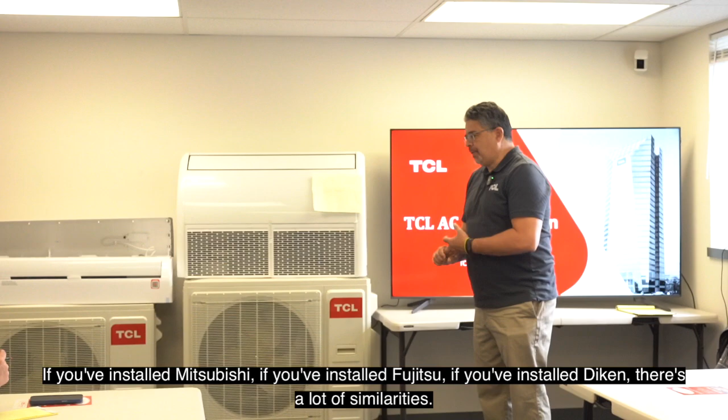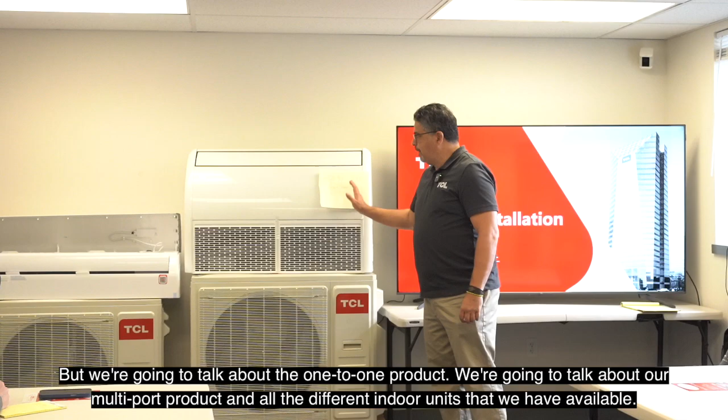country. If you've installed Mitsubishi, if you've installed Fujitsu, if you've installed Daikin, there's a lot of similarities. There's very little that separates everyone in that aspect. But we're going to talk about the one-to-one product, our multi-port product, and all the different indoor units that we have available. That is our central air system. Everything we have here is inverter, and that central air system is our heat pump inverter, and we'll talk about

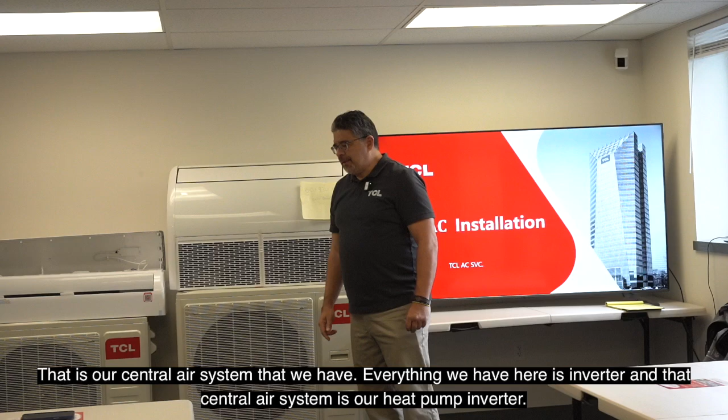that as well. So we have 4 hours, and I want to try to get as much technical information to you as possible. I thank you for giving me your emails, because with that, I will be sending you the service books on everything here. So you have error codes, how to troubleshoot it, startup procedure, how to wire it, things like that. We'll go over that today.

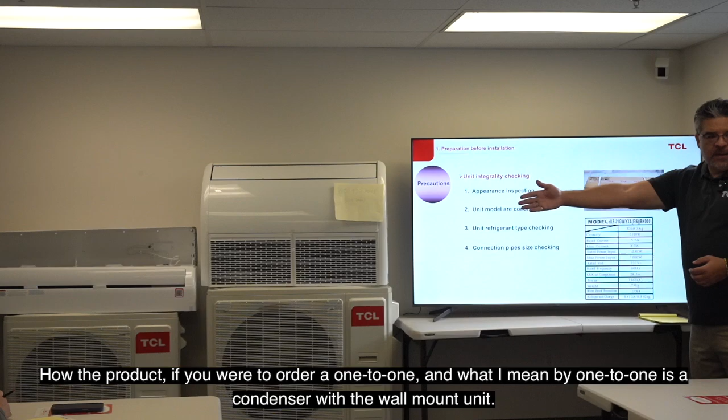So, preparation for installation. This is going to be strictly on the ductless product. We're going to focus on the meat and potatoes. If you were to order a one-to-one, and what I mean by one-to-one is a condenser with the wall mount unit. All right, picture the one that's in the corner there in front of the banner.

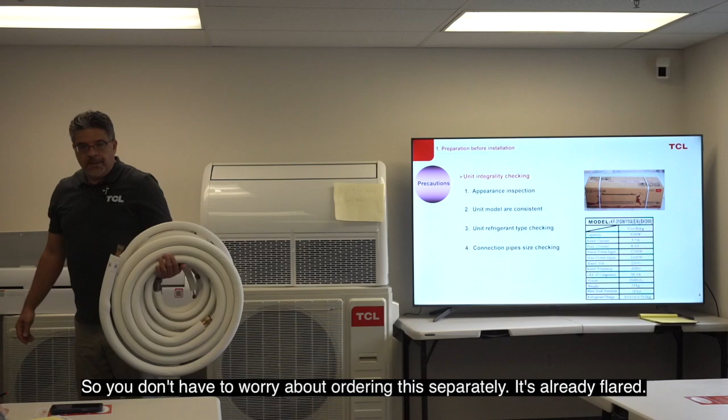When you order our TCL one-to-one, it's going to come with the line set that's already flared, and it will come with the communicating cable. So you don't have to worry about ordering this separately. All right, it's already flared.

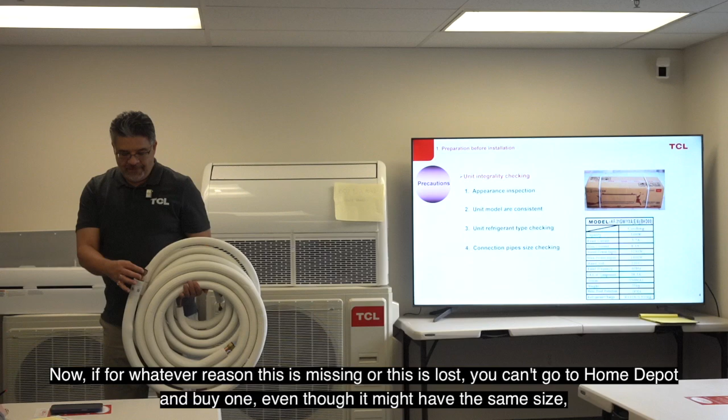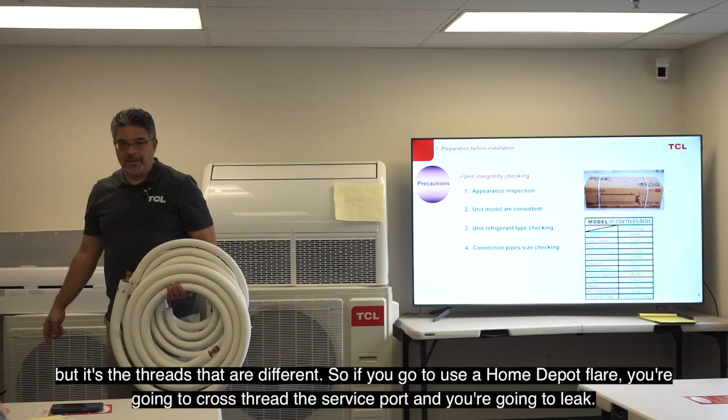Now, if for whatever reason this is missing or lost, you can't go to Home Depot and buy one, even though it might be the same size, because the threads are different. So if you use a Home Depot flare, you're going to cross thread the service port and you're going to leak. So keep that in mind.

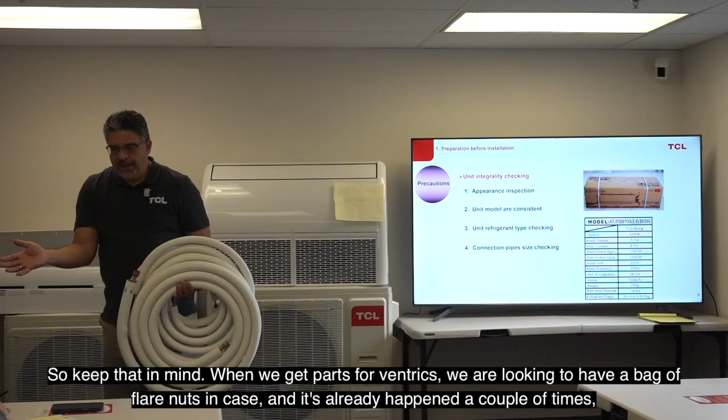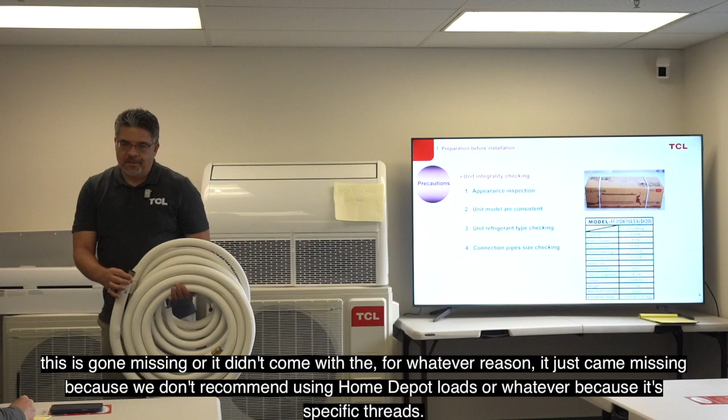When we get parts for Ventrix, we are looking to have a bag of flare nuts in case, and it's already happened a couple of times, this has gone missing, or it didn't come with it for whatever reason. Because we don't recommend using Home Depot, Lowe's, or whatever, because it's specific threads. So that's one thing. You're gonna get the line set. You're gonna get the 4.

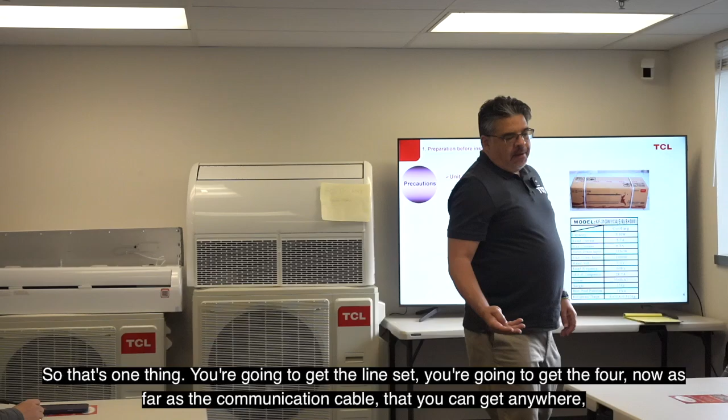Now, the communication cable you can get anywhere, but it's basically 16 gauge, 4 wire. One of them is a ground, and it's stranded, not solid core. You understand what I mean by that, right? Solid core is just one copper line. We look for stranded because we are talking about DC communication, and when the line is stranded, where the copper looks like a bunch of hairs, it strengthens your communication signal.

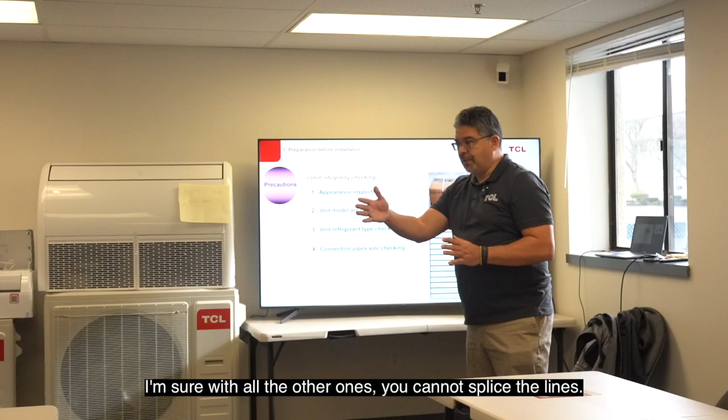So you have one solid core, and your DC volts bounce like that as communication. But if you have a wire that has several strands, it's going to be bouncing off of each hair, strengthening that communication. This is why they look for stranded, and you cannot splice it. I'm sure with all the other ones, you cannot splice the lines.

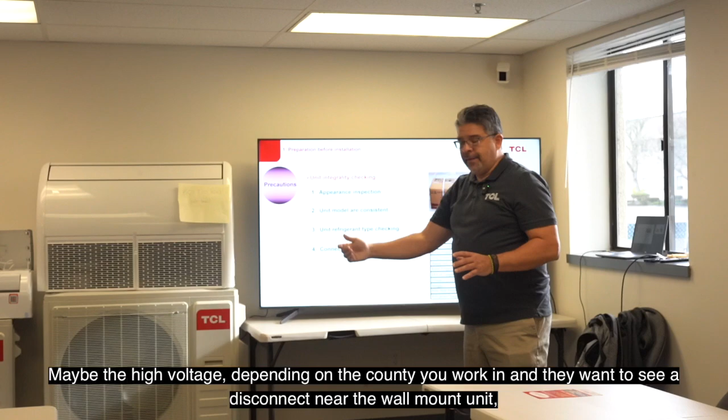Maybe the high voltage, depending on the county you work in, they want to see a disconnect near the wall mount unit, but usually it's a home run from the condenser to the wall mount unit. You cannot splice between there, because the splice is usually not a good connection, and you'll have that nuisance intermittent communication problem, and you don't want that either. So those simple little things are what you want to keep in mind.

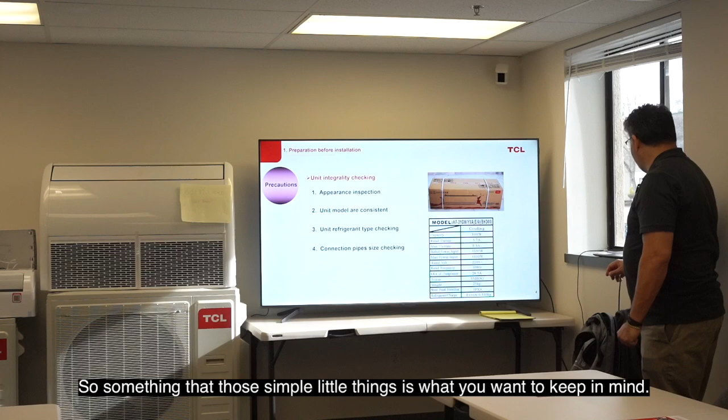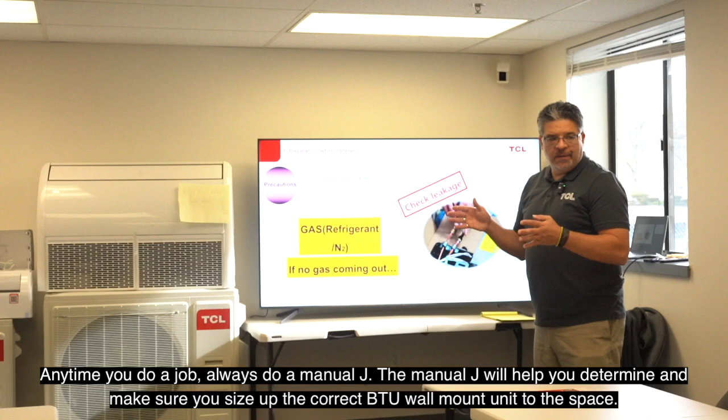I'll mention it today like I did yesterday. Anytime you do a job, always do a manual J. The manual J will help you determine and make sure you size up the correct BTU wall mount unit to the space. Because you have to take into account the insulation, the windows. It's not just square footage, okay?

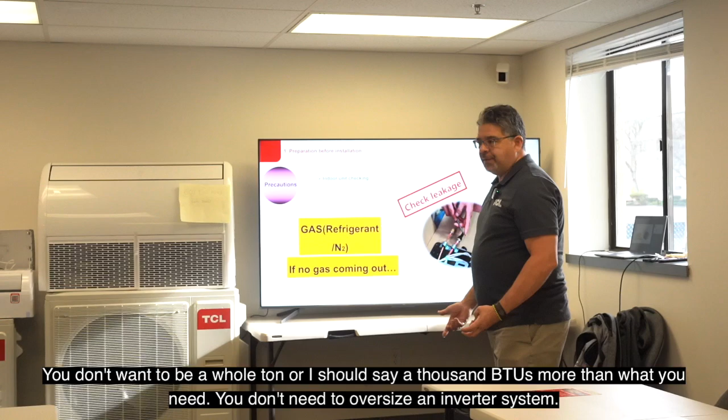Because you don't want to be a whole ton, or I should say 1,000 BTUs more than what you need. You don't need to oversize an inverter system, okay? Because you will still run across the same problem as a straight cool unit. If you're oversized, you're going to drop the temperature, but you're not going to dehumidify. It's going to be cold and clammy, and that's the worst call to be at.

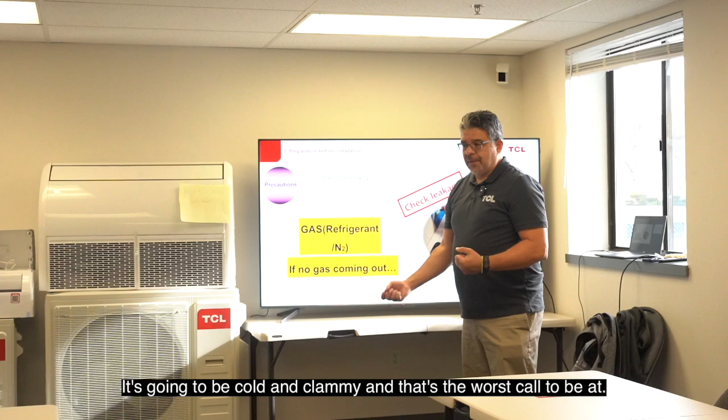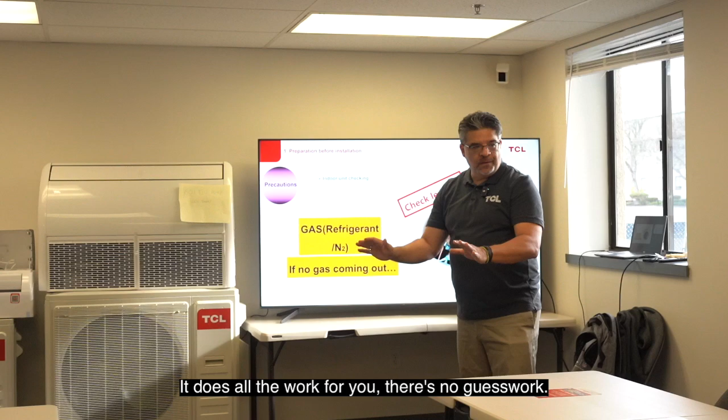All right, to cover your rear ends, do the manual J. It does all the work for you. There's no guesswork. Then you see exactly how many BTUs you need for cooling and heat, and that's the size you get. Throughout these slides, we'll show you what sizes we have. We have from 9,000 BTUs to 3 ton. And then on the 9 and the 12, we have 115 volts and 230 volts.

So if you come across a house that doesn't have space for 230 volts, but they have room for 115, we do have a 9,000 and a 12,000 system that you can use for 115 volts. Okay. But always keep in mind that's going to be a different size breaker between the two.

Okay. So when you receive it, the indoor units do come pressurized. So when you push in the Schrader pin, it's going to be nitrogen. It's not gas. So the first thing you do is push that to make sure you get some nitrogen coming out of it. That tells you the unit is not leaking. All right. If you compress that and nothing comes out, don't start the install. Call Ventrix immediately and get yourself another head. Something happened. It leaked out.

It's nitrogen. Okay. These condensers don't come pre-charged? The condensers come pre-charged. The indoor unit is the one that comes with nitrogen. So just quickly push it in and see if you get nitrogen coming out. Boom, you're good. But if you get nothing, there's something wrong with the indoor unit. Stop the install right there.

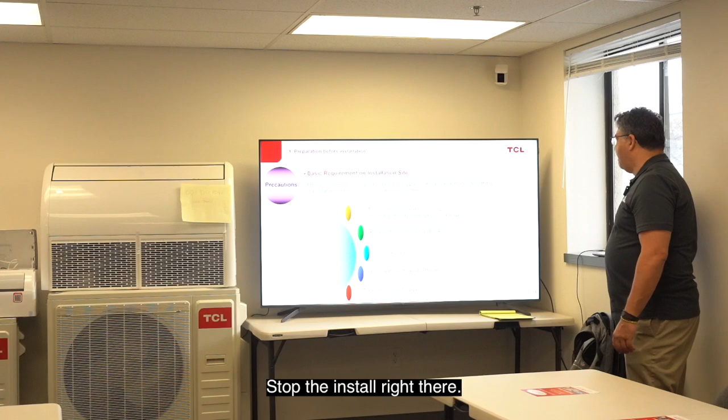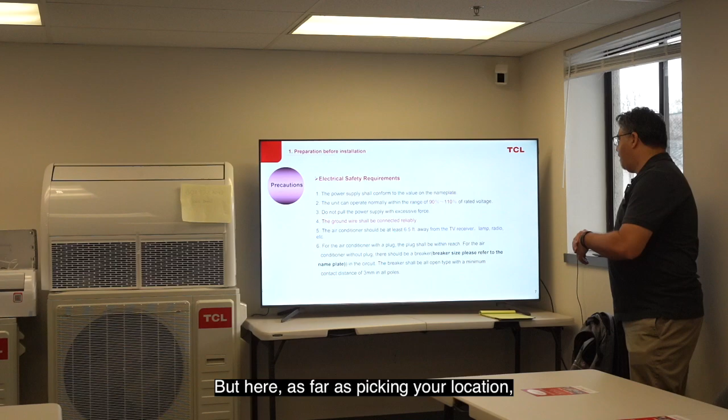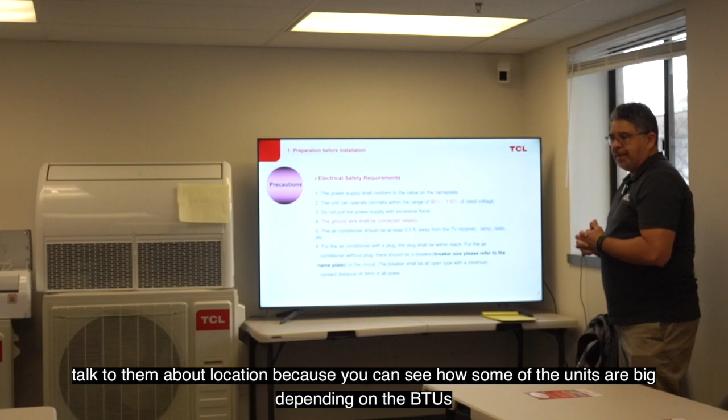Now, yeah, we are talking about the new R454, so we'll be talking about ventilation and things of that sort later this morning. But as far as picking your location, when you're talking to the homeowner in regards to this ductless product, talk to them about location, because you can see how some of the units are big depending on the BTUs and also on which model you choose. This is our Breeze In 24 SEER unit, and you can see it's kind of big. That's our Elite 20 SEER model.

You talk to your homeowner and say, hey, this is what it's going to look like mounted on your wall. And you might have some that will be like, yeah, I don't like the way that looks. So then we have a slim duct unit. This is the one that you would find in a soffit. It'll be a little bit more hidden. Or up in an attic, all right?

We also have a cassette. This is the panel of the cassette, but we also have a cassette model where in the drop ceiling it'll fit perfect on this grill here. But you just have to remember you need access to service that unit, the cassette, because the board is external on the top.

You can't get it from underneath. All right. You see the two wall mounts, and then this model here is our floor ceiling model. You can install it one of two ways. This is how it would look if you put it on the floor, up against the wall. And in the ceiling, all you do is just flip it like that. All right, up against the wall, but up on the ceiling.

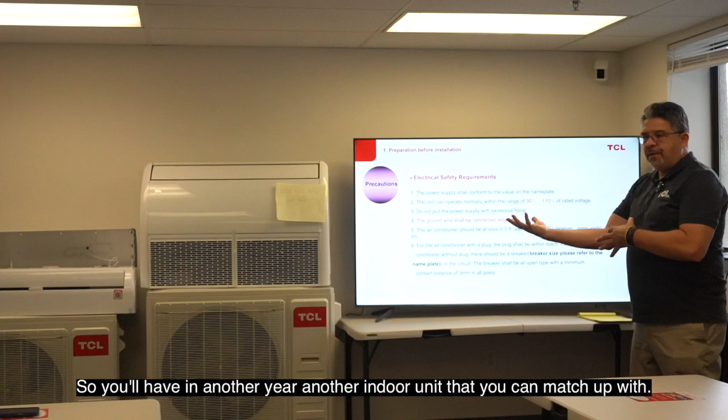So this would be something for maybe a store or classroom or something where there is no attic. Screened-in room, whatever. Floor ceiling model. And we're working on an air handler type to go with this multi-port. That air handler doesn't go with this system, that's separate. But we are working on an air handler model to go with these condensers. So you'll have, in another year, another indoor unit that you can match up with, okay?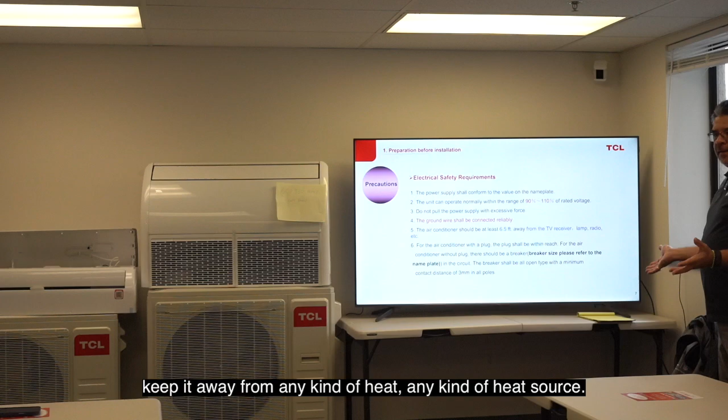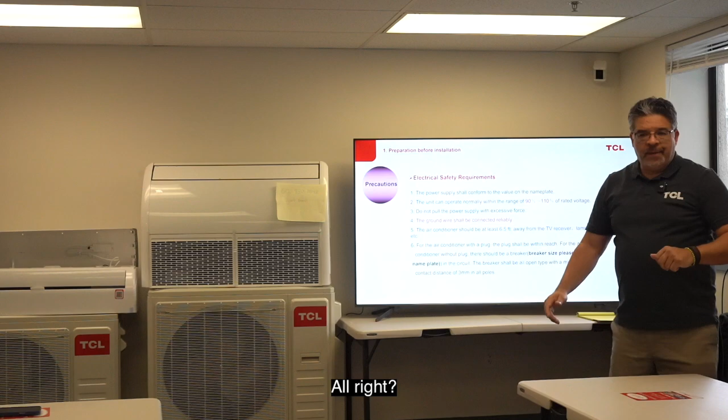So when you are picking a location, you want to keep it away from any kind of heat source. Like these TVs give off a lot of heat. So you want to keep it away from the TV. You want to keep it away from lamps. Keep it away from a chimney, things of that sort. Try to put it central on a wall. Because you have louvers that, when the system is running, modulate vertically and also horizontally. So when it's centrally located, you get that airflow that covers the entire room. All right.

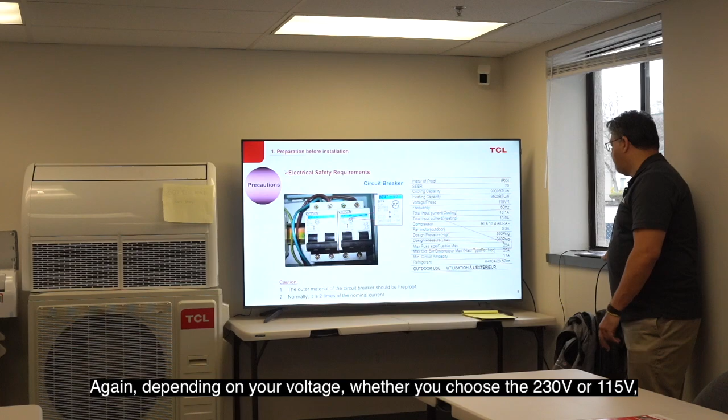Here we're talking about our BTUs. So again, depending on your voltage, whether you choose the 230 volt or 115, look at your fuses because they're going to be different between the two. All right.

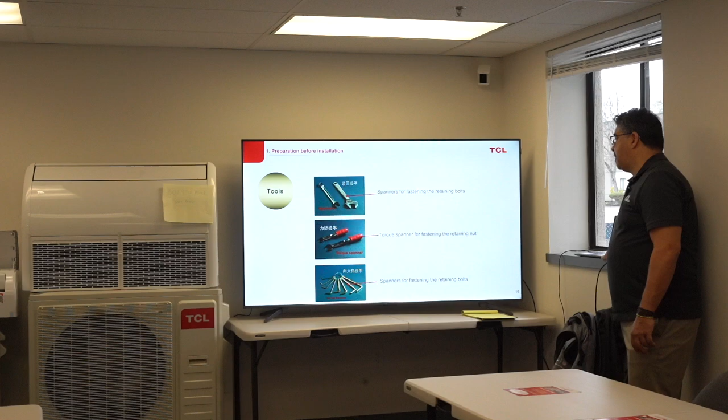Your tools. Here they're showing you a crescent wrench and all those things, but honestly, the torque wrench is probably going to be the most important tool you're going to need. If you've never worked with a torque wrench before, that's in the installation books. It will tell you the measurement. It'll give you the pressure that you need to adjust the wrench, so that when you're tightening the flares, it'll release once you reach that pressure point. So you're not going to over-tighten, causing damage to the actual flare.

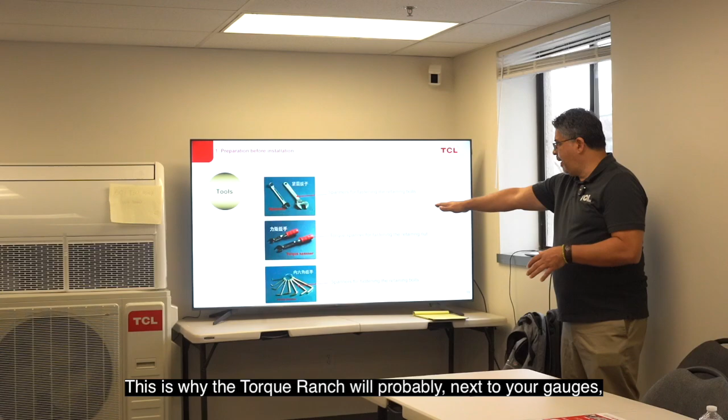So you don't crush the flare, causing a leak, things of that sort, or you don't tighten it enough, causing a leak. This is why the torque wrench will probably be next to your gauges. I think the torque wrench will be the most important tool in the whole installation. It's worth the investment. Your drill bits to cut your holes for the line set.

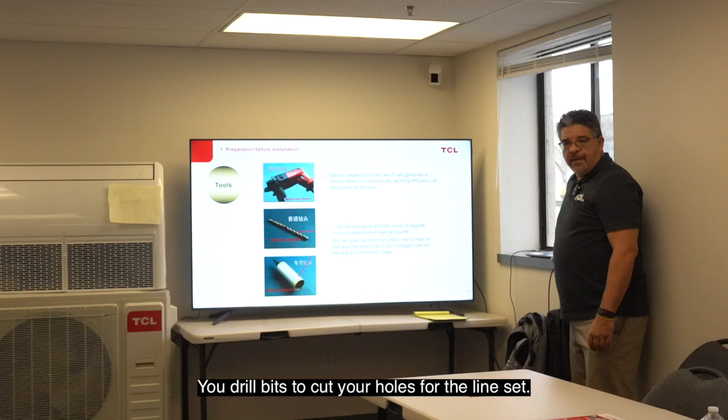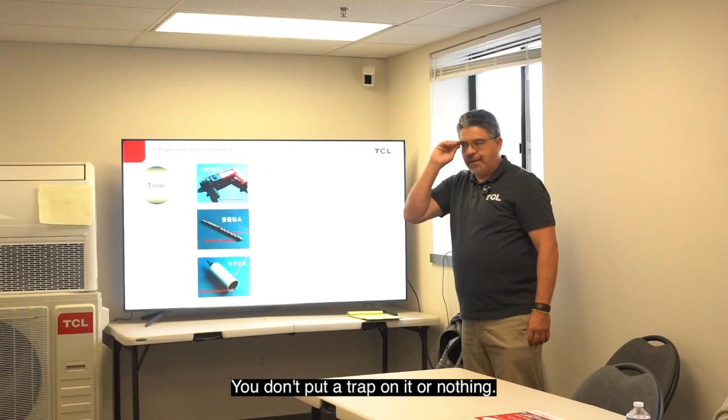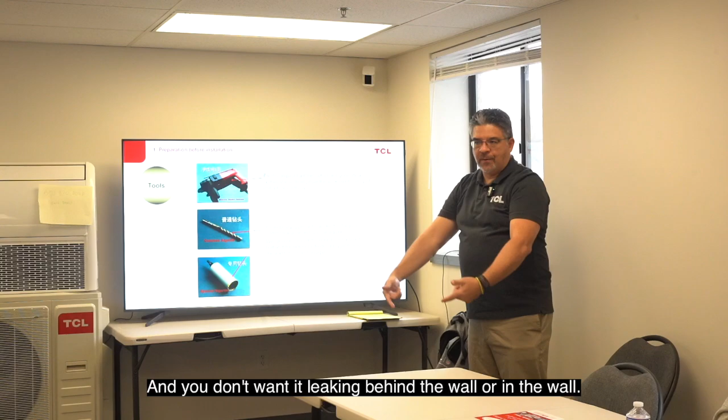All right. The most important thing with the line set, when you're drilling your hole, you don't ever drill it straight. It has to have a quarter pitch downward, because this is natural gravity drainage. You don't put a trap on it or nothing. So with natural gravity, the water will drain downward. You go horizontal, you're going to have issues with water sitting in that line or in your pan. And you don't want it leaking behind the wall or in the wall. Downward pitch. Okay, just a quarter of an inch, doesn't need much. All right.

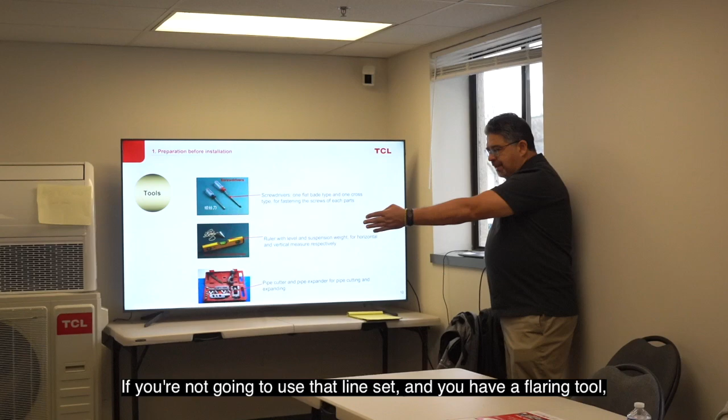Flaring tools: if you're not going to use that line set, and you know how to, and you have a flaring tool and the TCL flare nuts, you can make your own flares. That's not a problem, but it's good to have it, especially if you go more than 50 feet. You can go up to a maximum 25 meters or 82 feet with the 1-to-1s. The line set that's given to you is not 82 feet. So it's nice to have the flare nut tool with you.

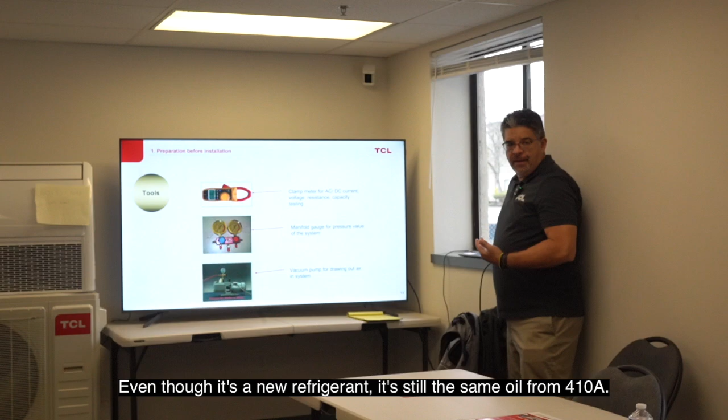Of course, your meter and your gauges. Vacuum pump, obviously, very important. Even though it's a new refrigerant, it's still the same oil from 410A. That oil is like a sponge. It loves moisture. So the minute you open up those lines, that oil is going to suck in that moisture. That vacuum pump is to remove that moisture out of that oil. All right, and keep the lines clean.